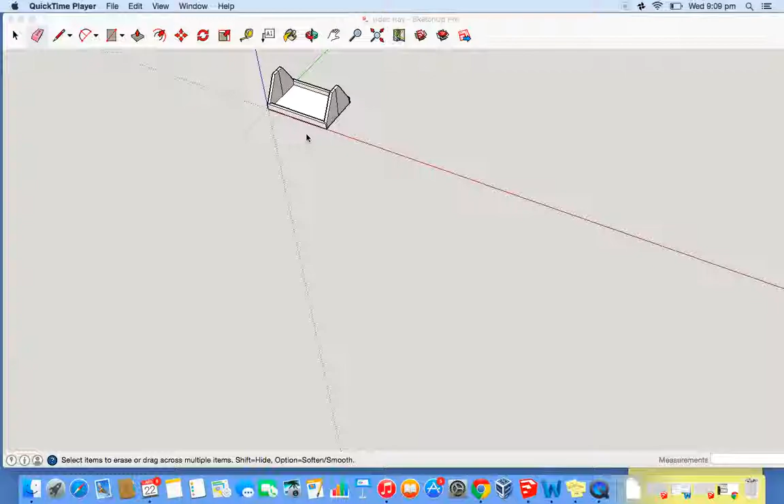Okay Year 9, we are now going to try and finish off our tray that we started in class, and I've shown you two videos now on how to draw it to this point. We're going to put in our base pieces, our cylindrical handle, and add some rendering and design detail to finish off the drawing.

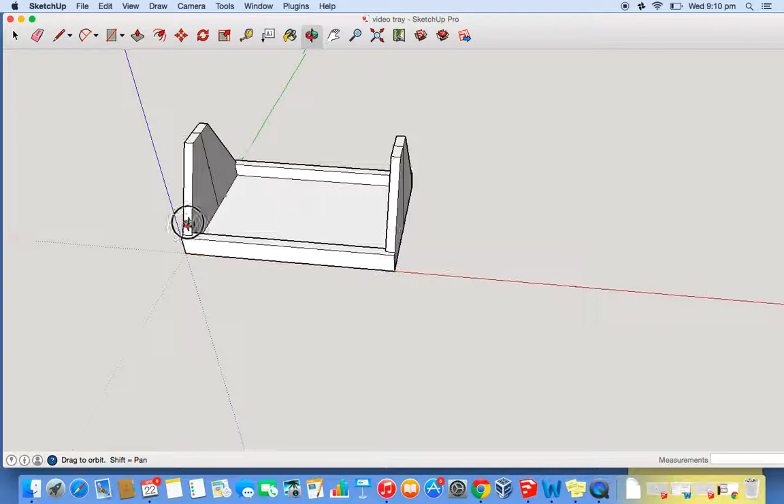To start us with, we've got our orbit tool on, which allows you to go all the way around your project. This whole time I've just been using the mouse pad on my laptop, but if you find it easier, you can use an actual mouse to control it, as well as zooming in and out.

So I'm going to zoom in and pick up my rectangle tool, and again you might need to select it from the drop down rectangle. Obviously this is the center of our project, so right in the center of the base of the tray is a 50mm strip of Meranti.

We're actually going to draw that, and there's lots of different ways you can do it, but I always find it easy to work off a reference point, so we're going to use that with the rectangle tool.

First of all, I'm just going to orbit so we can see this length better. If you want, because I know the measurement, I've done this drawing before, but if you were to do a different drawing and had to do this same technique, to actually know the length you have to draw to, you can get your measurement tool out and just quickly measure that, and down here in the box it says it's 412mm.

Now that we know that, we can escape that, pick up our rectangle tool, and half of 50 is 25, so we're going to draw to that width, and you'll see why in a moment. I'm going to get to the green point there, draw out, and simply type in 412,25 and press enter. I'm going to do the same on this side, and hopefully some of you have worked out what I'm doing here.

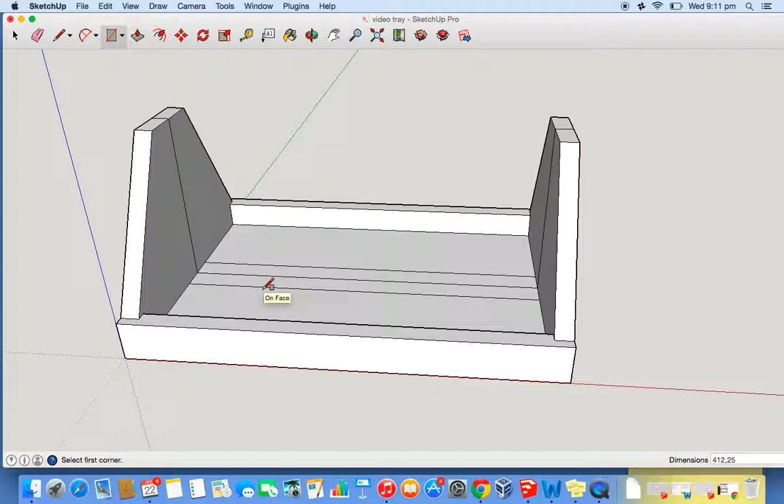I have actually made that 50mm strip just by doing 25mm on each side of that center line. So it's really that simple, and that's exactly how it looks there.

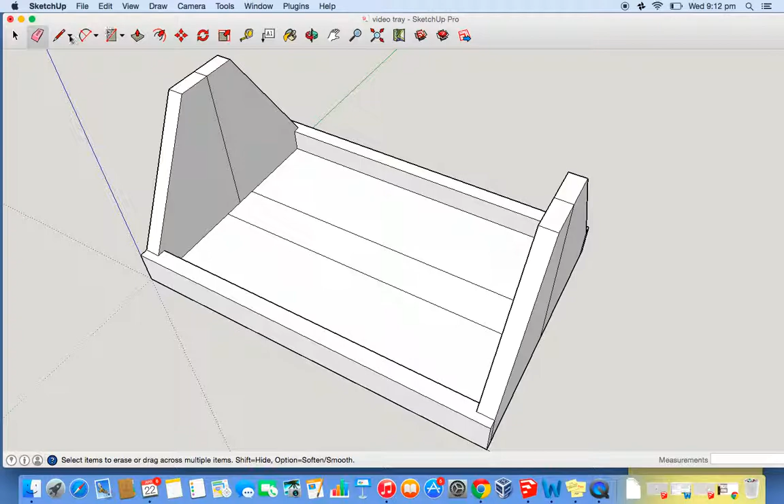We are then going to draw in our handle, and to do that again we can use our measuring tool to draw a construction line instead of using the pencil tool. So we're going to get the measuring tool and draw down 25.

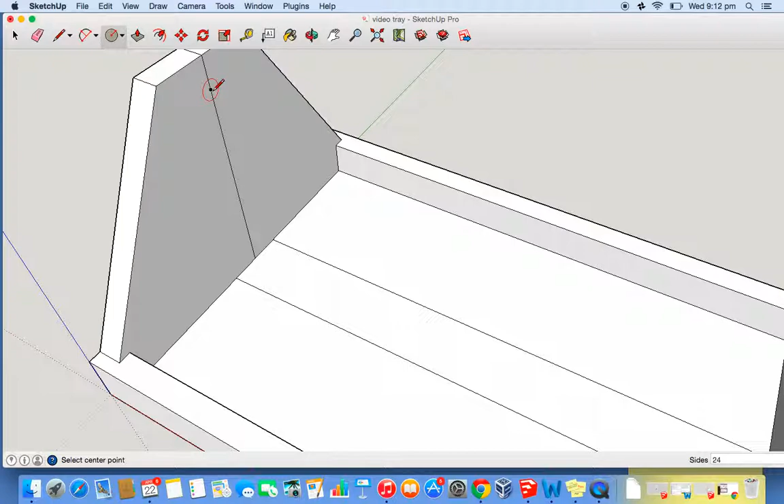Then select circle, and with the circle tool it will want to draw to a radius, so you can see that little point just there. We have to work out what our diameter is, and a radius is always half of that. So we're going to draw our handle to a diameter of 25mm.

Half of 25 is 12.5. So I'm just going to select from that point, draw out, and then type in my keypad 12.5, enter, and you will get a circle there.

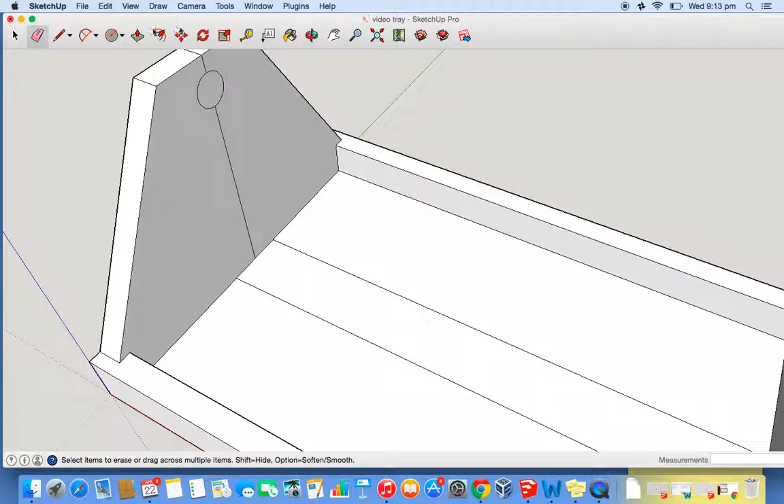You can then go in and delete those lines and construction points, and that will now allow you to push and pull that. You might need to zoom out and orbit a bit to see the other end at a good angle, which we can do now, and push and pull that over, and you should get to the green point where it says end point, and press your keypad. If I just orbit that, you can see now how that's really come together.

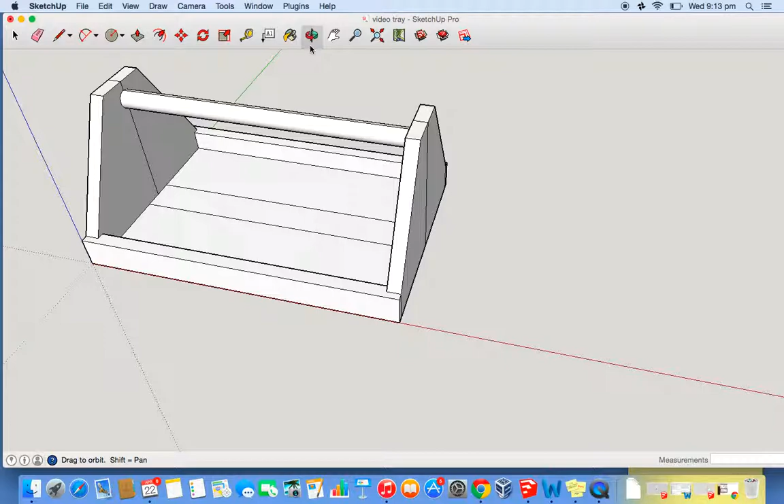So the last thing we need to do now is just add some colour and actually make this look like your project in the workshop in real life. To do that, we use the paint bucket tool.

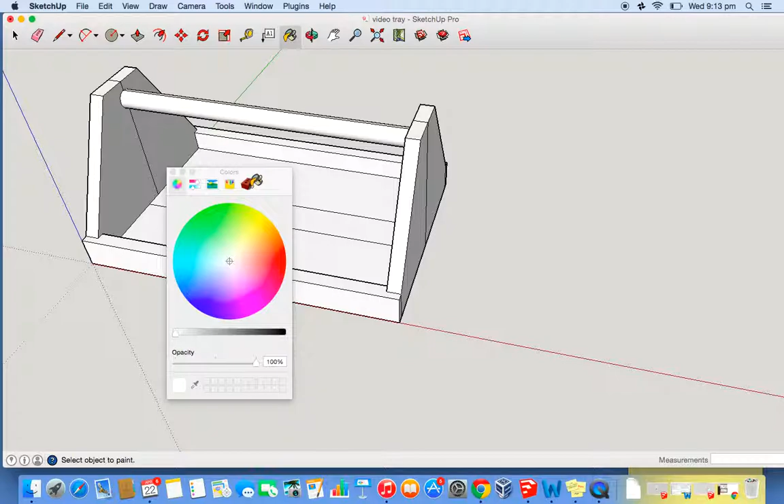When you go to paint bucket, you can select colours, and obviously it's going to be a matte finish with no grain detail to mimic timber. So you can use that, but it's better to use this brick symbol here, texture palettes. You can change the scale or brightness of the colour you choose, looking at opacity and the spectrum. You can use the crayons as well, but most of the time with timber and furniture design you will use texture palettes.

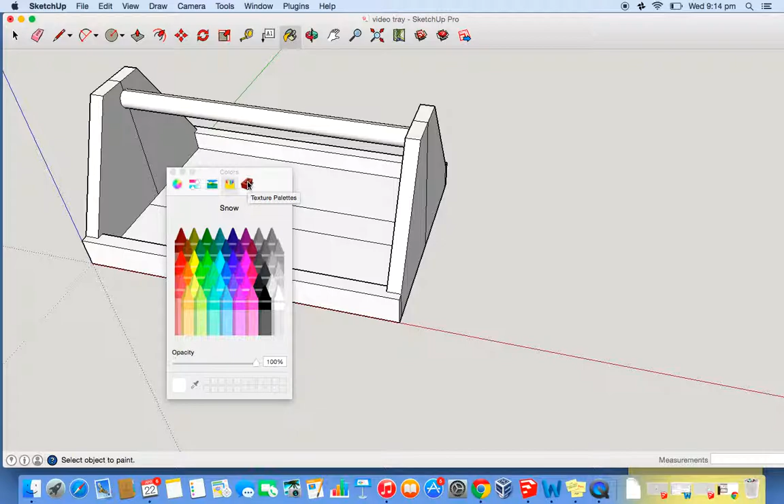So click on that, and I always find I have to play around with these different colours to find the right one. Let's start off with the one in the middle, because we know that's Meranti, and to me it's this kind of colour here.

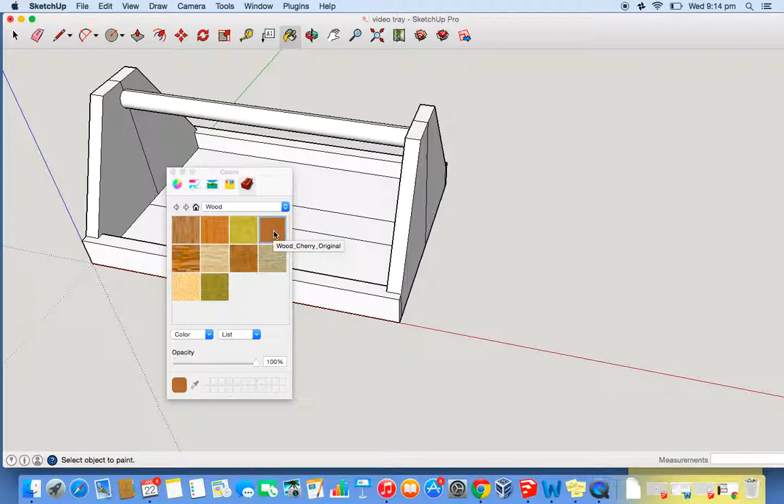To be honest, not the biggest selection of colours to choose from, but for the purposes of what we're doing it's going to be fine. If you just hover over there, it says Wood Cherry Original. Click on that, and you'll have your paint bucket, select that, and it will go that colour.

So I'm just going to hover over these ones here. What's this? Yeah, cork, that's not really a radiata pine colour. Flooring... okay, yeah, they're not the best.

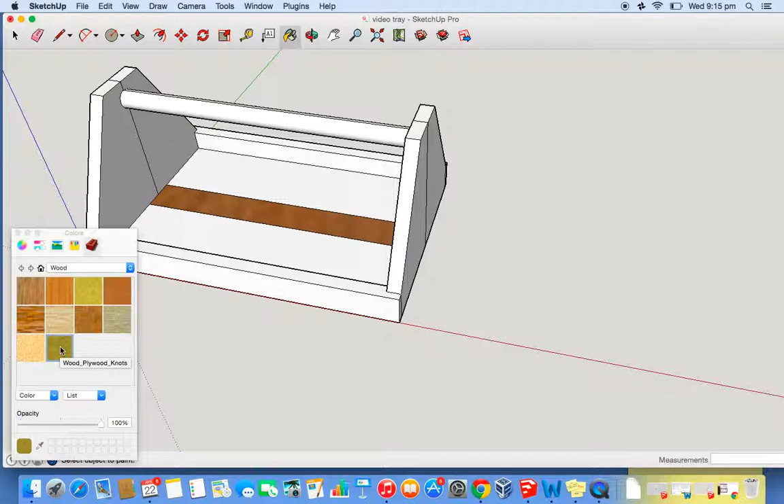Let's go with this last one, which is plywood, a manufactured board, but it has a radiata pine finish. Let's see what that looks like. Yeah, it's not too bad.

Sometimes you can play around with the different options. Okay, see, that looks much better, that looks more like pine to me. That one's horrible, so don't use that one.

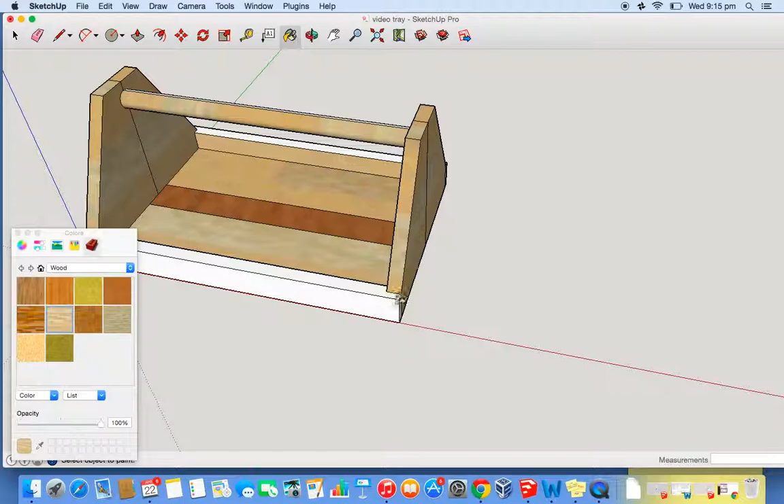I think we should stick to this one. So you just go through and select all your faces and make sure they're all in colour, and just like your workshop, you'll have to use your orbit tool to go around and do that.

And pick your paint bucket back up, and yeah, it should be finished once you've gone all the way around and done that.

So yeah, I'll leave it at that because I don't like the videos to be too long, but there is your finished design of your tray.